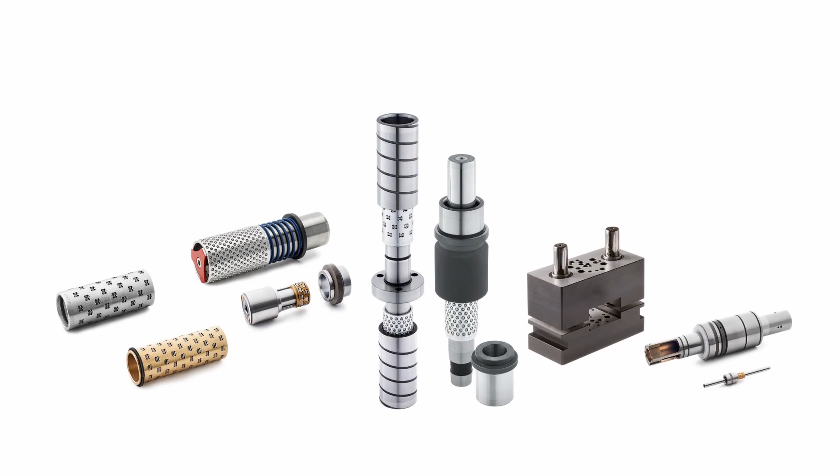Now we are going to talk about the portfolio of the Agathon standardized guiding and centering systems. We may also have a look at the applications. The application range is guiding, centering and quick change.

In the middle picture we see the first customer segment we have: stamping die tooling, shown in vertical position. You see the pillar, middle flange pillar, stripper plate mounted, and on the right the quick changeable pillar, which is often used in rotor stator die tooling applications. On the pillar, on the lower side we have a regular ball cage mounted, and on the upper side the roller cage for dynamic use.

On the left you will see the standardized products for mold construction. In the front, you see a centering system, and in the rear, our customized solution, often used for 24/7 main guide applications. At the end of my time, you will see the new product that is going to replace this more or less customized product.

For mold we also have a roller type, different from the one introduced first. It's a special roller guide with a line contact, made for very stiff and long-lasting guiding, and therefore it's a very good way to guide and center mold applications.

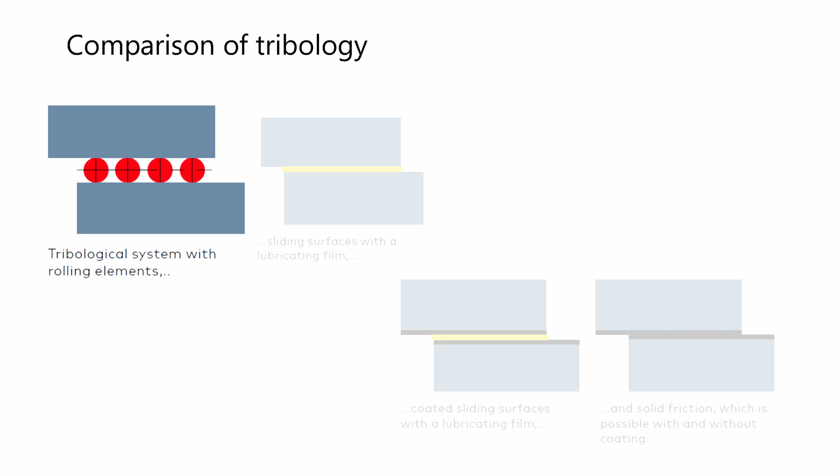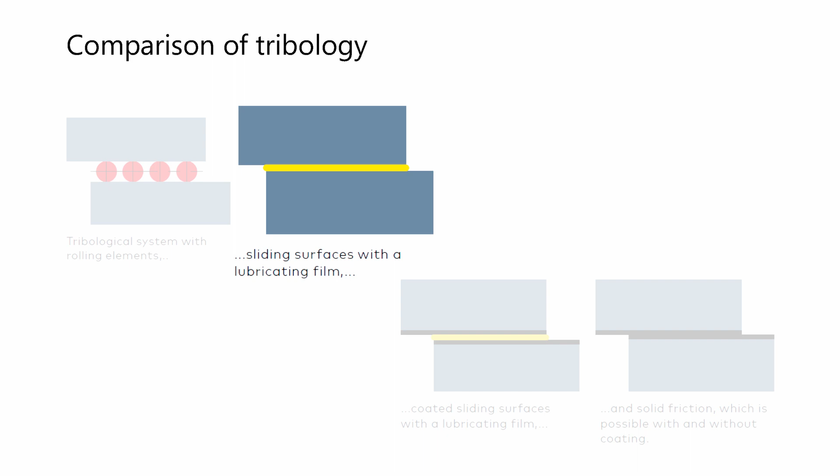On the right you see the sliding guide, which, as you may know very well from mold making, is very often used in mold tools. There are huge differences in the way they work. Rolling elements are long lasting because they roll, they have the perfect preload, and they need very little lubrication. Compared to this system, the sliding applications are a different and more difficult story, I would say.

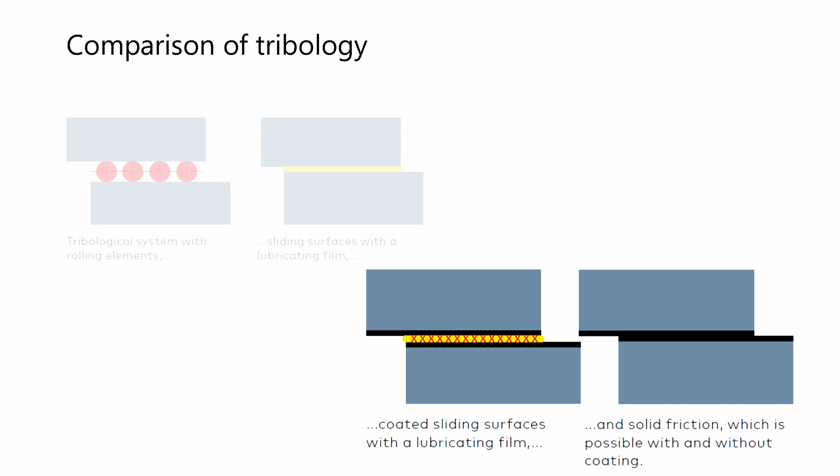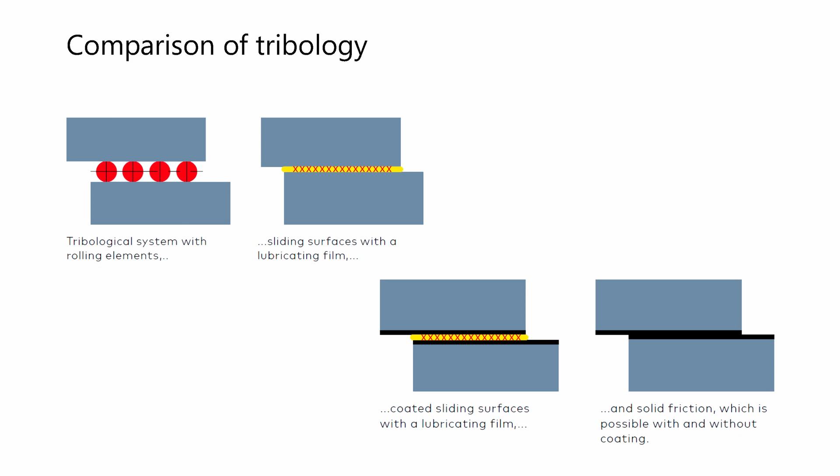In these applications, we often try to lubricate them, but since we have a linear move, the lubrication does not reach the region where it should be, between the two parts. Because the system is not working very well, we start to coat the sliding areas with a perfect coating. But we still have solid friction, and after a while the coating may disappear, as you can see in the picture. This can happen very quickly, so you almost have no chance to stop the application. This can be a disadvantage.

For the rolling elements, this is an advantage, because on a preloaded guide element you can see the wear, and you have plenty of time, just in case, to replace them.

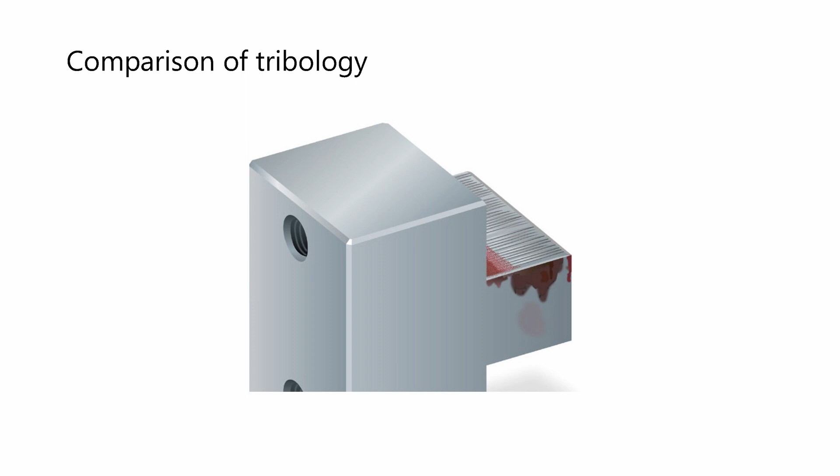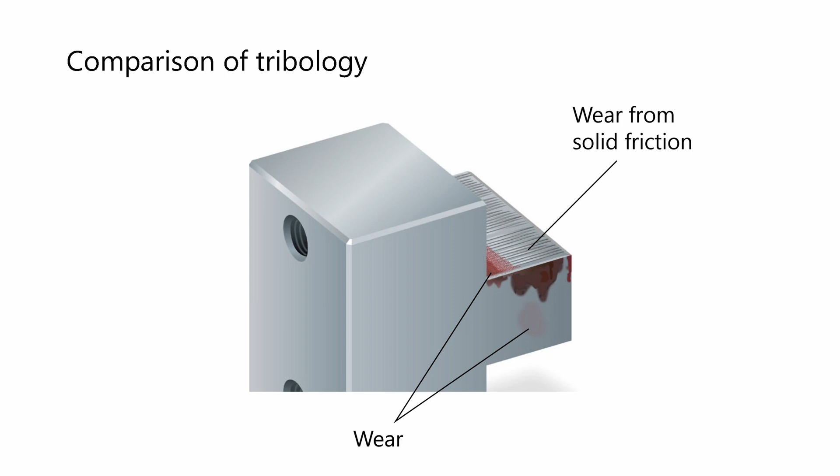Also have a look at this system regarding lubrication. The lubrication is everywhere, but not on the sliding area. Therefore we have solid friction. This guide block system is very much open, as you can see.

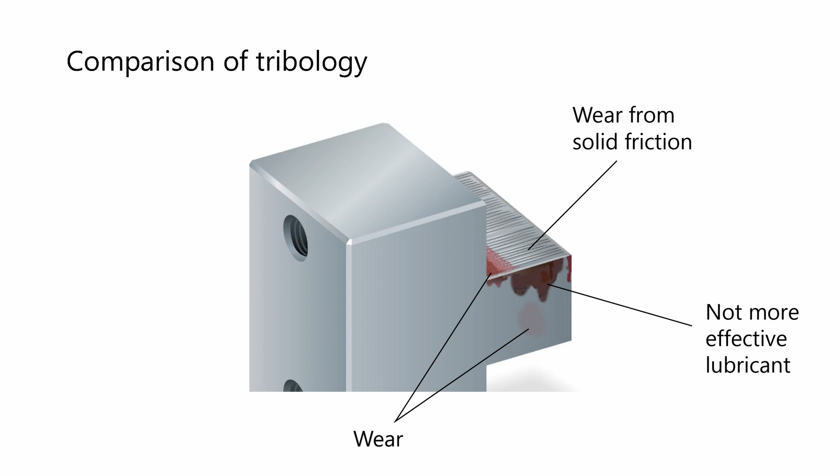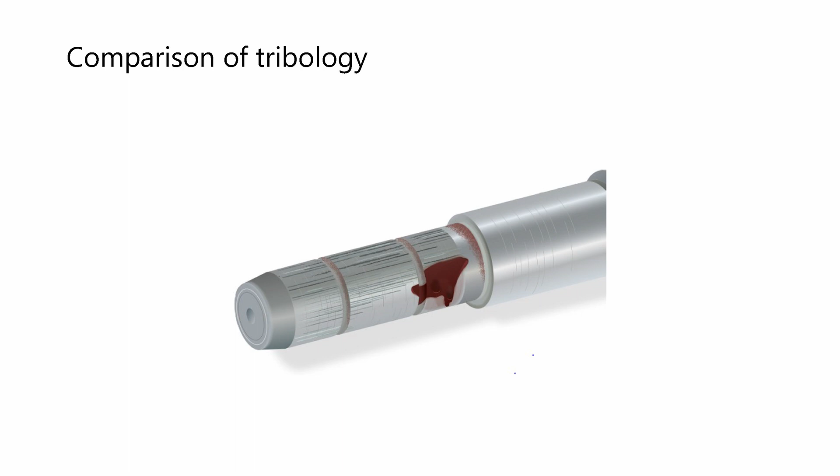Therefore the wear can drop out, and the good news is there's almost no cold welding, so the system does not block. When we go to the other system of the sliding pins, there we have cold welding because the wear cannot drop out, as you can see in this picture. Also in this case the lubrication is everywhere, but not at the spot where it should be.

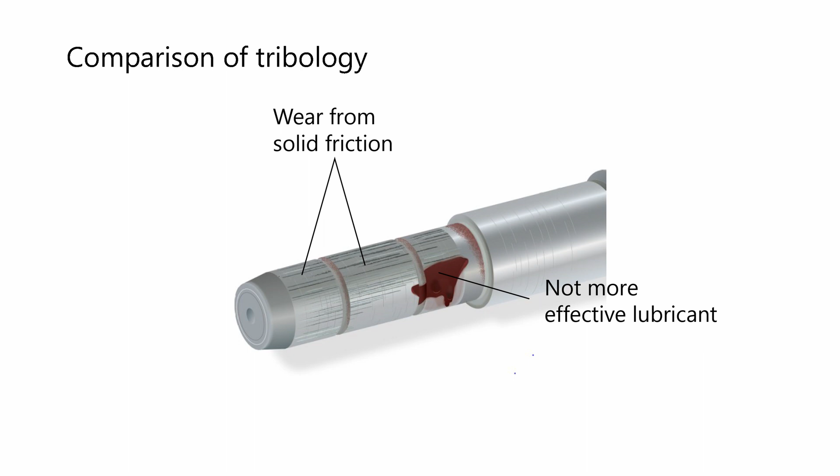When we go to the lower right, we see our system with the rolling elements. You see we have a cage holder system that keeps the cage in the perfect position. Once the bushing starts to center and enter the system, it becomes perfectly aligned, and thanks to the preload it's clearance free, so it's most accurate. You also see the rolling element in the cage. In this case it's a brass cage.

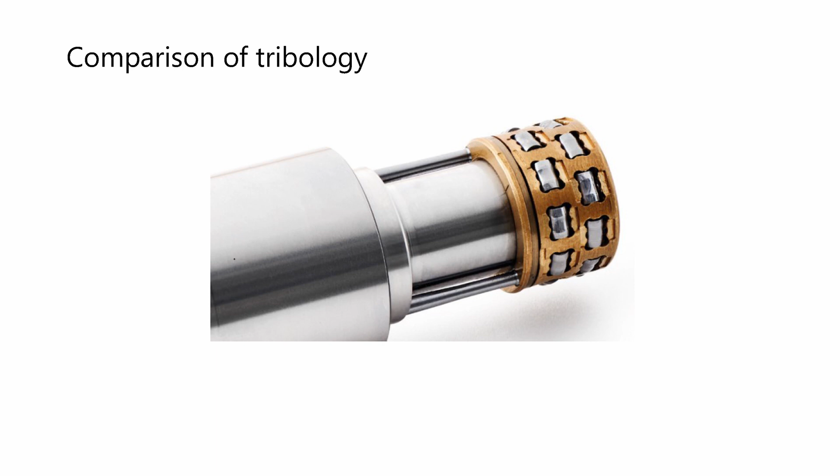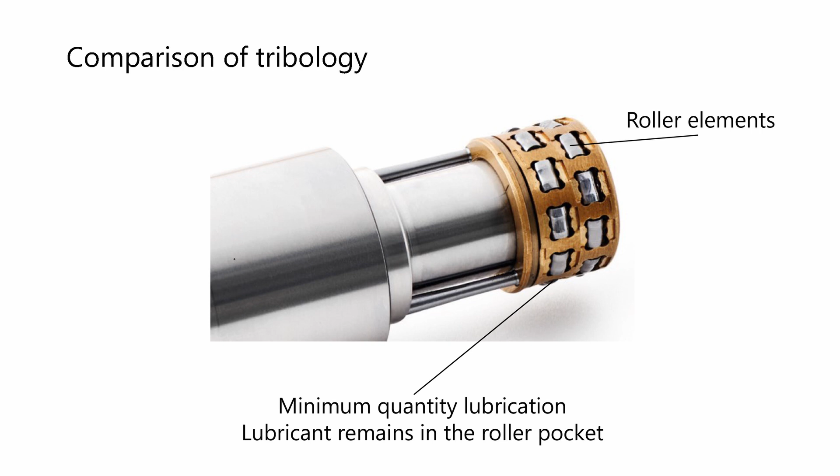About the lubrication: our guide elements, thanks to the rolling system, don't need much lubrication. Even when you have too much lubrication on the cage, you can flush it away. It's only important that you have just a little bit of lubrication in the pocket itself. This little lubrication will lubricate the roller and its counterfaces very well for the next week or two weeks, so you have a very long time where you can just start your production without any relubricating cycles.

Now we are going to have a look at our centering portfolio. We actually started 10 years ago with the centering system. Before we only talked about guiding. 10 years ago we started with the standard 7990 on the upper left. It has an aluminium cage. At that time we started with 3 sizes, with pillar size from 15 up to 32 millimeter.

Now, in the meantime, this year we also launched a large one which has a pillar size of 50 millimeter. With this range we can cover a mold range starting from 125 millimeters up to over 1000 millimeter, even these big mold tools.

Then we go to the middle upper side, the 7993 standard. It's a kind of premium centering system. Why is it premium? Compared to others, it has a much longer guided stroke, L5 - about 50% more than the other standards have. It also has a very much improved and finished design system to hold the cage, so there's also no wear from the cage holding system, which is very important for clean room production. And then we have a brass cage for two reasons.

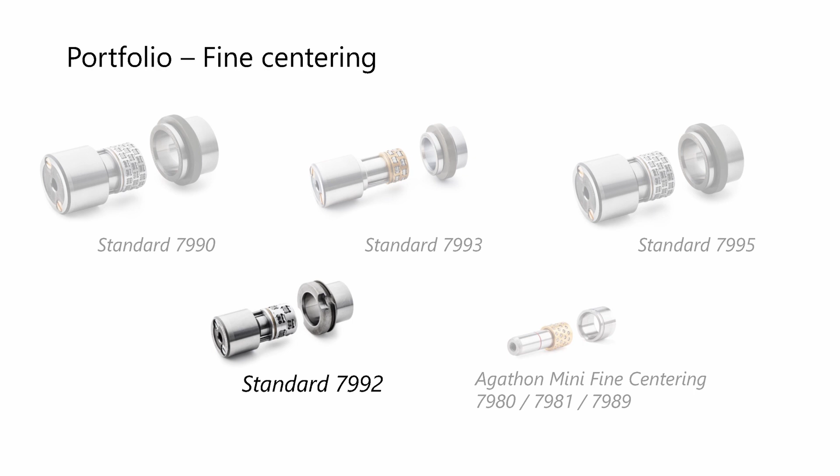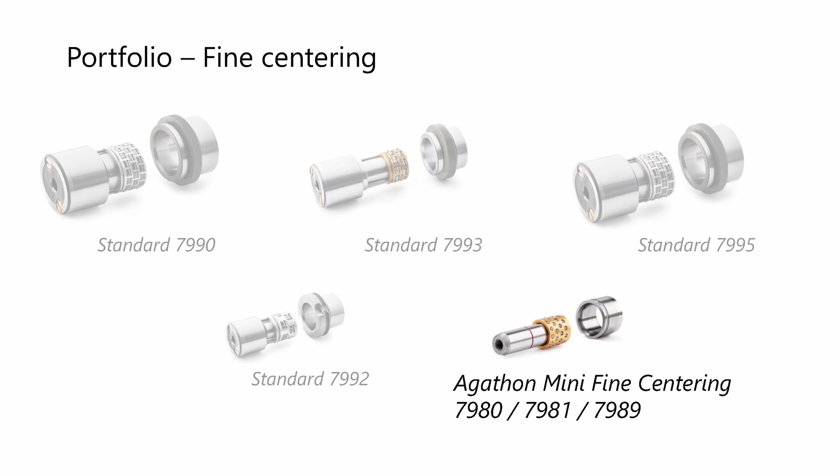But since the market required even smaller centering systems, we came to the latest design we made for centering: the so-called mini fine centering system from Agathon. The standard is 7980, with options 0, 1 or 9, so you have 3 options. 0 means you can order them without bushing, so you have to machine and manufacture the counter-rolling surface yourself. You can buy the whole unit, meaning pillar, cage and bushing. And even for the automation guys, we also have additional bushings, so you can extend your application with additional bushings. So this is the very much grown portfolio for centering systems we now have in our program.

Let us look deeper at these applications we can cover with these different standards on the next slide. Now we look deeper at the centering applications, also about the new features we made in the recent past.

This effect you won't have with the rolling elements because they just roll out very easily. The tool makers will love it, I can promise you.

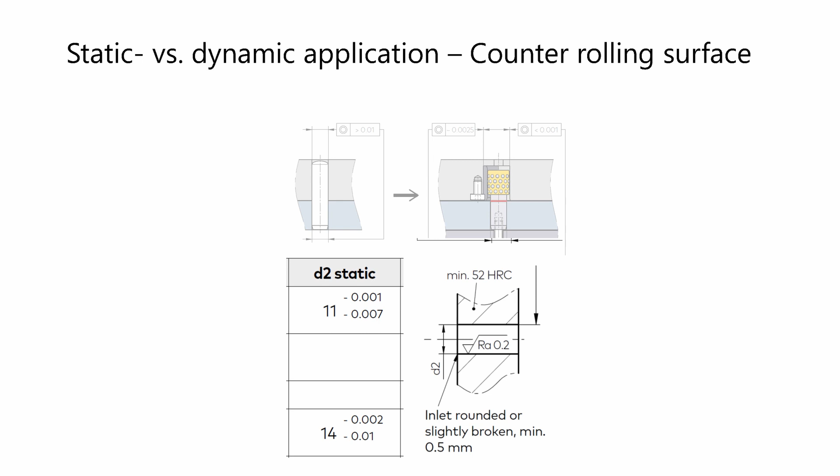It's about 6 micron, and today via EDM they can easily make them. You also get from our brochure the surface quality. We made this recommendation as easy as possible. It's RA 0.2. So this is for the static application.

We started this 2 years ago. Also important for static applications is that you at least reach a Rockwell hardness of 52.

Then we go to the more demanding applications, the dynamic applications. Dynamic, we understand as a mold tool that is endlessly going to open and close, and each time the centering system has to center the cavity or the whole mold tool. This is what we call dynamic.

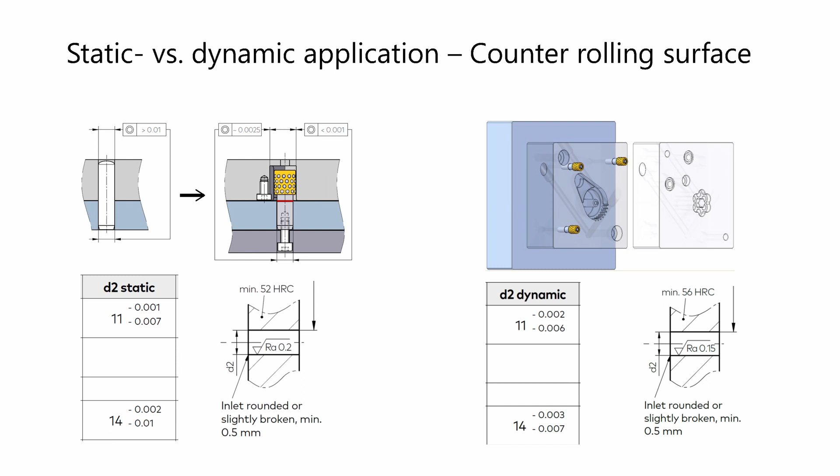You can see it on the upper right of this picture. This is a floating cavity. If you have a very close look at it, you will also see the coolant bore.

On this occasion, I can show you also the high advantage you get with the mini fine centering, because you have a very high design freedom. You can place them wherever you like, and it's also up to you how many you're going to use.

To center 2 plates, it requires at least 2 centering systems. So then you can decide whether you use 2 bigger ones or 3 smaller ones. As you can see, you've got a lot of design freedom for this.

Of course, since it is dynamic, we had to narrow the tolerance. So the tolerance is smaller than for the static application. Also, we require more hardness - we recommend 56 Rockwell. So these are the recommendations.

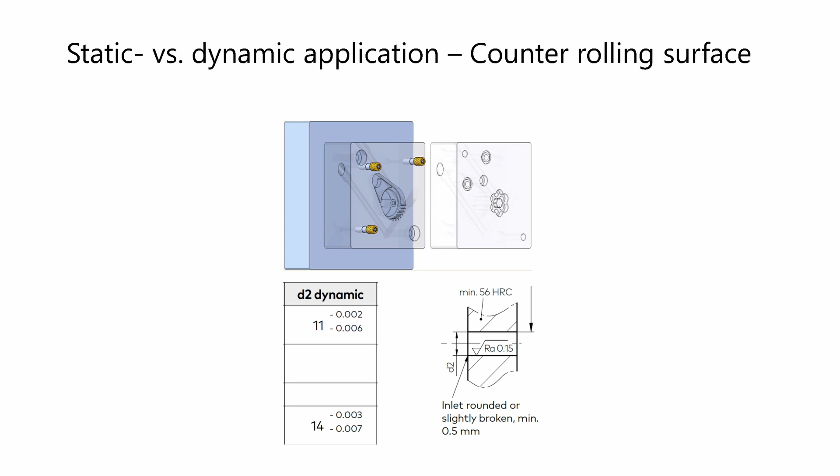Also on the surface quality, we did increase that a little bit to RA 0.15. But everything today is possible to jig grind or even wire EDM.

Now we look a bit deeper at applications where we have very tight spaces to place any centering system. I prepared 2 customer applications. In the middle you see the application - it's red marked. On this red marked area, you should place a centering system. So this is almost not possible to make, as you can see.

On the left you see the guide block, the smallest available standard-sized guide block, and this one is definitely too large. And even when you imagine guide blocks, you always have to use minimum 4. There's absolutely no space left at all for a guide block centering system.

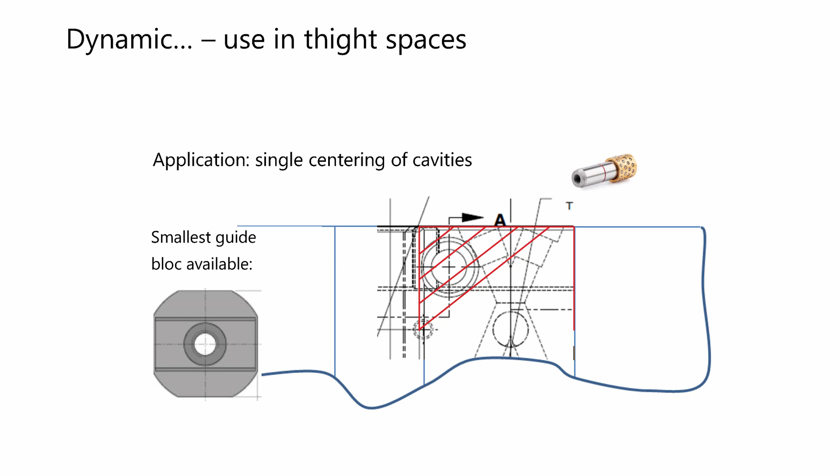That's why a centering system from Agathon has become important, even to use this feature without the bushing, by a self-made counter-rolling surface. You then see on this application that there are also coolant bores, and of course the coolant bores have more priority because they get the most perfect plastic part. So then there's definitely not much space left.

But thanks to this new feature that the customer does not have to use a bushing, he could place our centering system in. He only had to use 2, and then he was happy to run this application clearance-free.

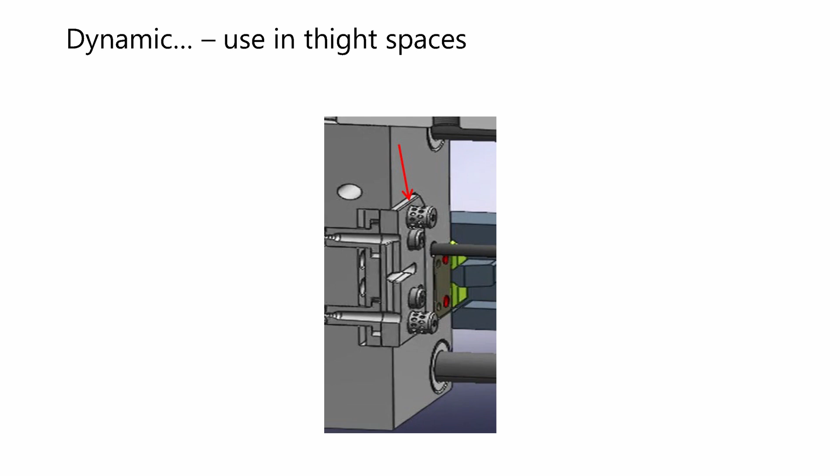One more customer application we have on the right. This is a so-called short stroke application. In this case, the counter bore never leaves the preload, so it does not disengage.

In this customer application, we were very happy about the fact that the customer, anyway, planned to use a hardness of 60 Rockwell for this plate, so that's perfect, because we recommend a minimum hardness for dynamic use of 56 Rockwell. Mostly in mold making, they have a Rockwell hardness of only 54. So in this case, we were lucky.

It did work very well. In this case, the customer was changing from his own customized system. He used to use a pillar, then he spent a lot of time to fit them perfectly into this plate so that he had almost no clearance.

And after a while, of course, as you can see from the tribology system, he had wear. So from time to time he had to make his own customized pillar again, but with a larger diameter. Then he was rehoning the plate and fitting them together again. So he had too little lifetime on this system - he had to customize them.

Then he changed over to our system, and within a short time he already had the payback for this small amount of investment, and he is happy to guide them through the whole life cycle of his mold tool.

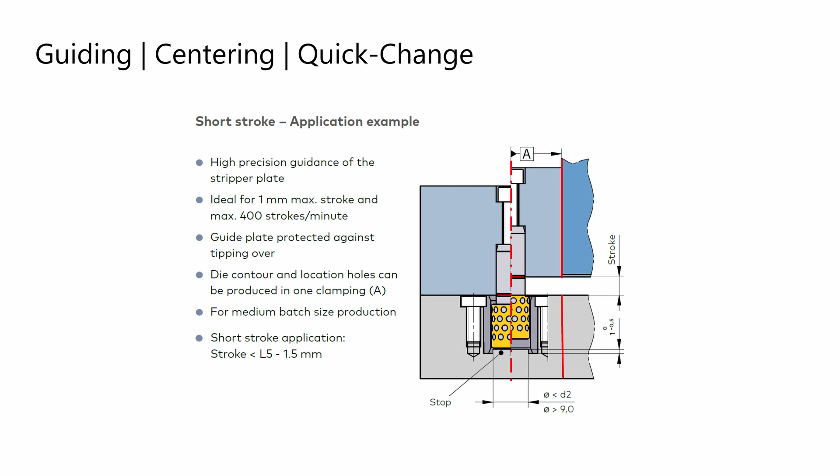Now we are going to have a look at the easy calculation for the designer. 10 years ago, when we started with the centering system, we decided to make it this way, as I'm now going to explain it. The easy calculation is based on the weight of the mold tool.

Then we just make it more easy. We just divide the mold tool weight by 2. So this gives you the weight, how much you have to lift off the mold tool to center them perfectly. And then we compare this weight with our C value, which tells you the load capacity the centering system is capable of centering. By this easy calculation you find how many centering systems you have to use. Of course, you can use a larger one or a smaller one, and then you get the number out of this calculation.

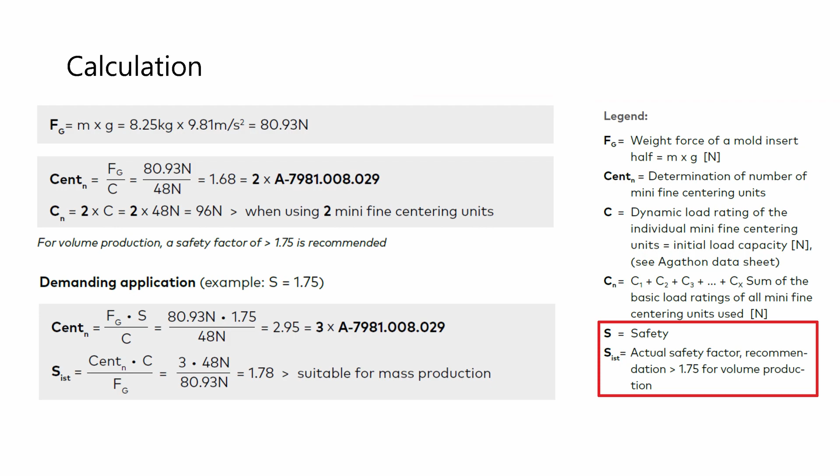Regarding the mini fine centering system, we developed this calculation a little bit further. We now have a safety factor. We make a difference: if you have a long-run application, then we recommend using a safety factor of 1.75. So in this example, we recommend not to use 2, but better to use 3 centering systems. So this is all about how to calculate and select our centering systems.

Still we have some applications left I didn't talk about or show you. The first I would like to introduce is the rotary demolding. You can see here, even for closures, this is the solution. Since closures are made in huge numbers, they need a very good guiding or rotating system. It's better than sliding, it's better to use these rolling elements.

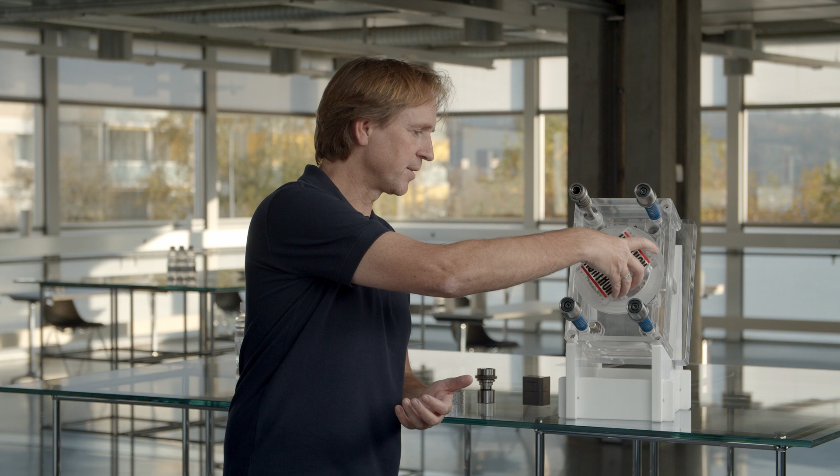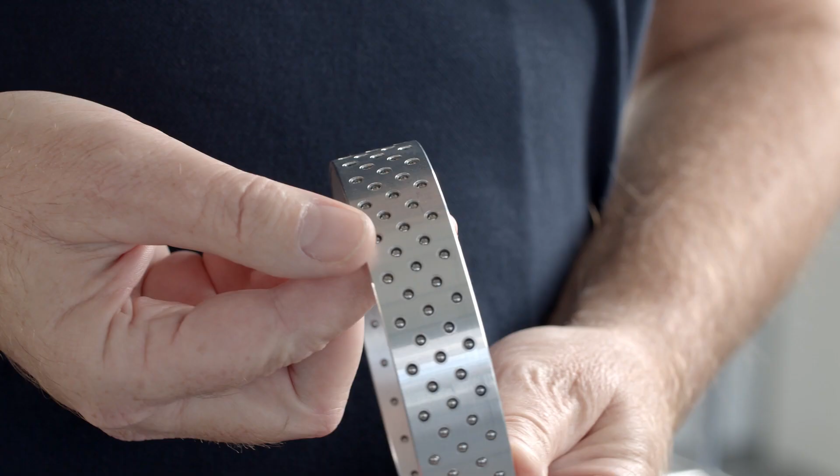For this kind of application, we often use a customized made ball cage. You can see that in detail. Again, you see how the balls are being separated by the cage material itself. It's long lasting, thanks to the fact that it's rolling. And of course, the preload is also most important in this case.

Usually in this application, you have very tight spaces, so you have to use very small balls, as small as possible in diameter. But the smaller the ball, the more accurate you have to preload them. So this is the knowledge about preloading. Even on this, Agathon can of course do more than just making the cage. We can also make the counterparts, which means D1 and D2, according to our catalog.

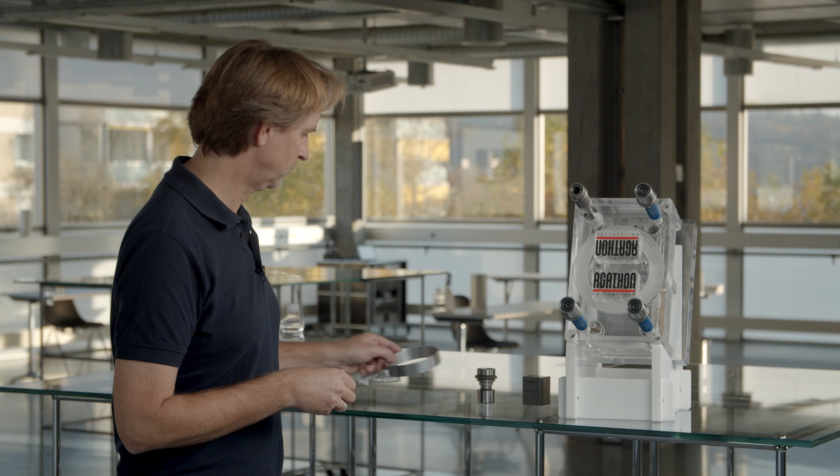Then I would like to show you the centering system, also in a few words. It's very easy functional, it is actually short stroke. And as you can see, thanks to the fact that the rollers are being preloaded, you cannot rotate them.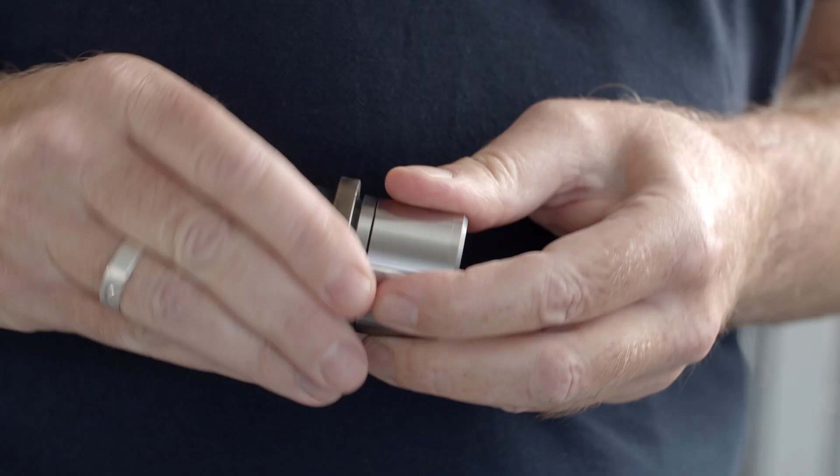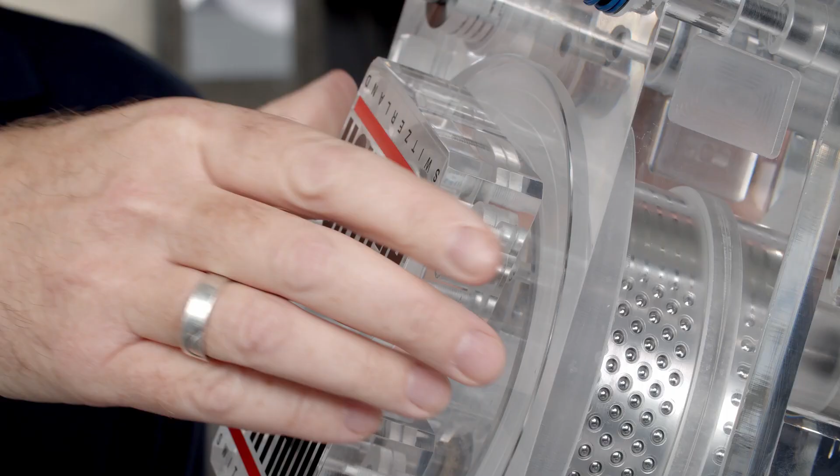Then let's have a look at the quick change. Very easy, as I already promised. It's not like a pin, it's just rolling in, rolling off, very easy. Very easy to mount. No special knowledge is needed to understand that. The same counts for...

floating cavities. You can make them in millions of numbers, and complete a lot of cycles with this rolling system. On the upper right, we have the main guide, the way we did it until today. This system is of course also preloaded, clearance free. Therefore you don't need any centering system—any additional centering system is not required.

It's working like this. It has even a larger way of centered conditions. And this also gives you a lot more benefit. The main guide in this execution is even made for a long-run application.

We can easily talk about up to 10 million cycles you can make with such a guiding system.

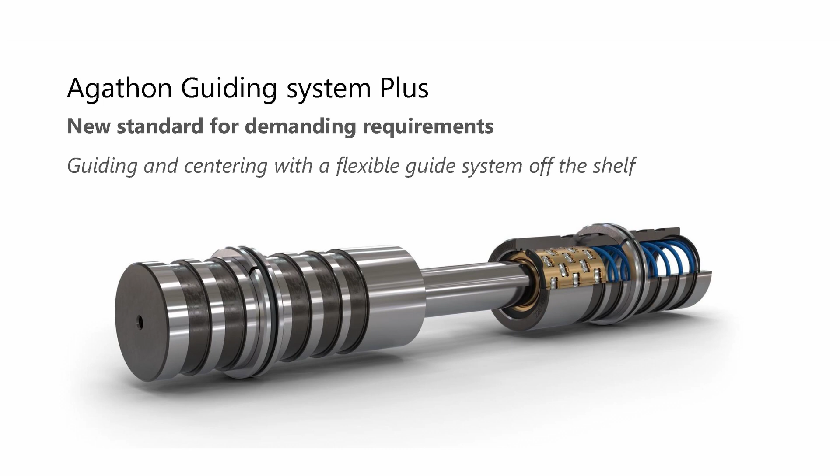In order to introduce our new concept, we'd like to focus first on the conventional guiding and centering concept of existing tools. The main guiding system of an existing tool usually consists of a sliding guide, the main guide, which moves and pre-centers the main parting line. Beside this, you have in the outer line installed flat centering devices, and sometimes round fine centering systems from Agathon.

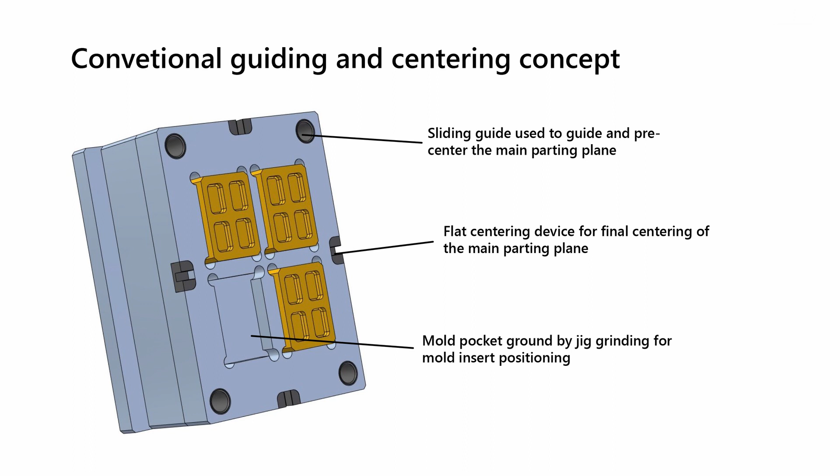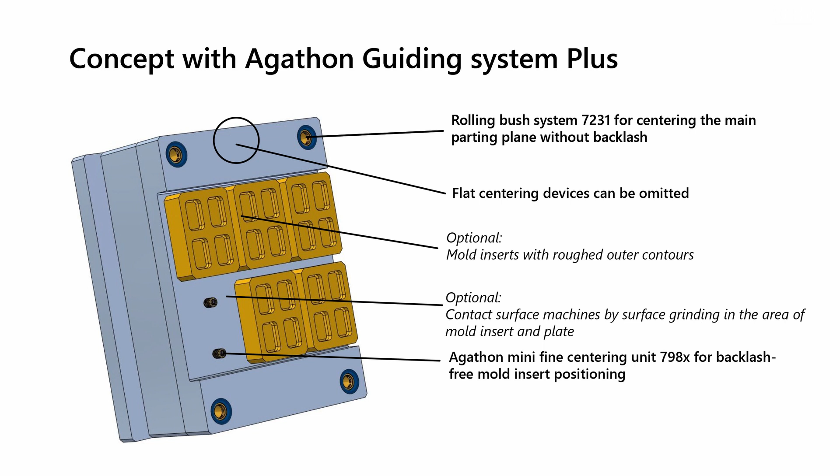Our new concept consists of combining both formerly mentioned tasks. That means we are combining both main moving parts and the centering tasks in one system. That means the flat centering devices can be omitted and you gain a lot of space for additional form inserts, meaning increased productivity can be reached with very little effort.

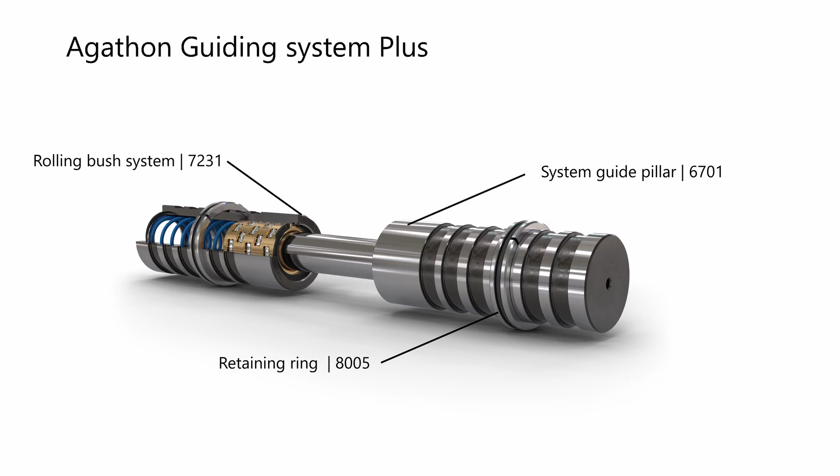The Guiding System Plus consists of two, respectively three parts. First of all, we have the rolling bush system with brass cage. Second, we have the guiding system pillar, and on both already inserted, we have the retaining ring, which helps to position the parts.

The brass cage resists the demands of ultrasonic bath cleaning. Additionally, it resists temperatures of up to 170 degrees centigrade, meaning it's a possible solution for high temperature applications.

The profile rollers are preloaded, meaning they are free of any backlash. They are very precise and extremely rigid, meaning it's a perfect solution for very precise parts.

Further, roller means rolling, and rolling is better than sliding, meaning we have much less wear, which helps increase your tool's life expectancy. Stroke speeds can reach up to 40 meters per minute, a plus of 30% compared to sliding guides, which helps further increase the productivity of the tool. Speed and long life expectancy mean it's an absolute reliable solution for 24/7 production, workhorses, mass production, and so on.

The long centering stroke we offer helps you center the mold plates from the very first positioning to the shut position without any backlash, and helps protect all the surrounding parts such as cores and shut-off areas. Finally, on the long guiding pillar, you can also guide the stripper plates if demanded, so you get a 3-in-1 solution on one system: main parting plate guiding, centering of the mold halves, and stripper plate guiding.

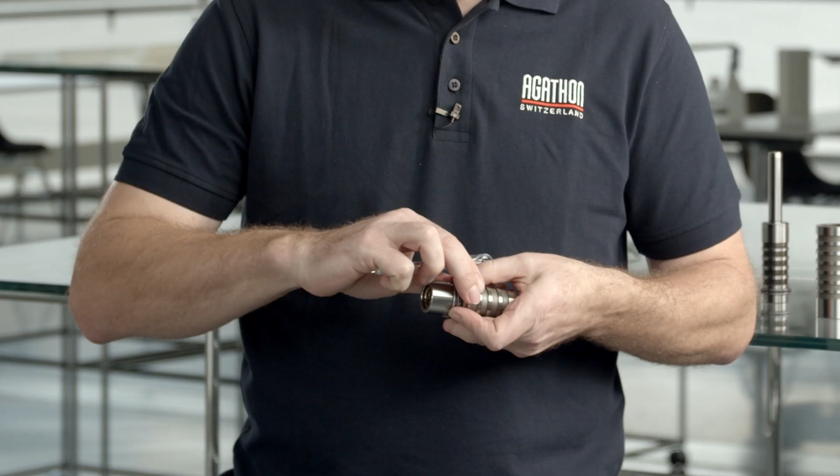I will show you how fast it works. You see, it's done in just a few seconds without any tools.

In case of maintenance, you can use only one article number for many different tools and many different plate thicknesses. That helps save a lot of space in your stock, which you can use for other more important things. The reordering process is also much easier; you don't have to type in many different article numbers, but can focus on one article number in bigger quantities.

The risk minimization has to be mentioned as well. In case of an emergency, if you are running out of stock of these article numbers, you can use guiding bushes from existing tools, disassemble them, install them into your new tools which you have to bring back to work, and save a lot of valuable time.

During the design and construction time, your engineers will love that. If they have to change the plate thickness, they don't have to look for another guiding bush which will fit the plate thickness, but can focus completely on the more demanding tasks. They only need to move the retaining ring from one recess to the other, and mission accomplished. Flexibility is written in capital letters.

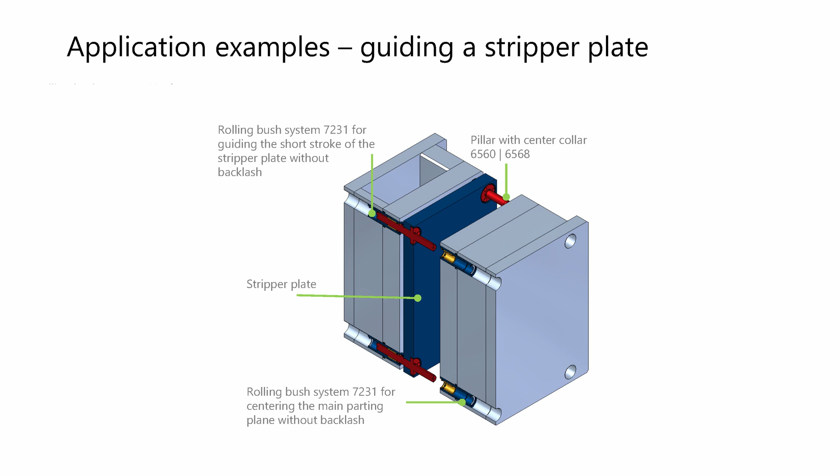What are possible applications? On this slide, we see the stripper plate guided on a middle flange pillar. In the front and in the back, we have installed such rolling bush systems, and this solution can be used for long strokes in a preloaded manner.

In this application, we are also guiding the stripper plates, but this is for short strokes only. If we have extremely long strokes, then we can use a sliding bush. But for the last positioning of the stripper plates, we could install the Agathon Fine Centering System Plus to make sure that the last positioning of the stripper plate is perfectly done.

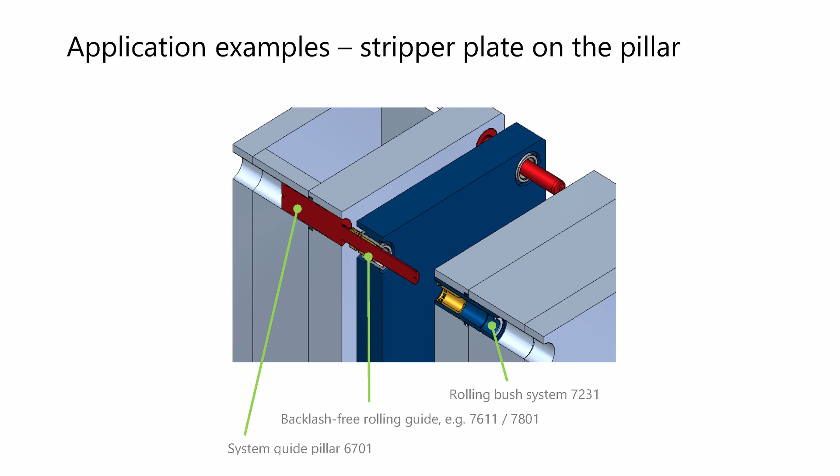What are further possible applications? It can be short strokes such as aeration strokes or ejection. It can be used on multi-stack molds, for cube molds, rotating molds. It can also be used on handling and robotics for positioning the robot head, to make sure the positioning of the head is perfect.

The demolding can be done very easily. Last but not least, inclined sliders can be guided on a single basis, or the complete ejection system can be guided at once. So, reward yourself with the new Agathon Guiding System Plus and grant yourself more planning security, higher production output, and lower total cost of production. And with this, thanks a lot for your attention, and I would like to hand over to Michael.